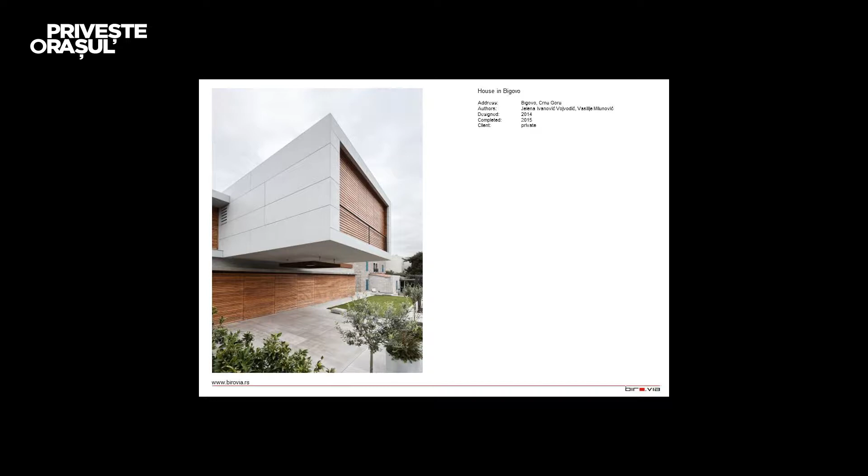So let me start with my lecture. It's going to be presenting some of the projects done in our office. Birovia means Vojvodic Architects, and I'm going to remove - I'm not so in love with myself. It's starting from the previous lecture I've done, and I'm going to start with the first project, actually, which is not my design, but I'd like to share with you.

My lovely wife, she's present here. She's looking at me with so much love. She's the one who is responsible for this wonderful house. And I should say wonderful really because it really is. Sorry, pardon my English. I suppose you will understand me quite well. And because someone says pictures tell a story more than 1,000 words, I'll start with reading some of the words and showing you pictures.

First project is in Bigovo. This is a small village in Montenegro. In front of us is a single family summer house. Thank you, in Montenegro. This is a result of previous cooperation with the investors for whom the authors had already renovated an old fisherman's house nearby. I'm going to show you this.

Bigovo is a seaside fishing village located in one of the most beautiful natural bays on the Montenegrin coast. The investor bought an adjacent plot and the existing 3-story building, and he demolished this building just to have a completely free plot to build what you're going to see. The new building is a product of an extension of the investor's needs.

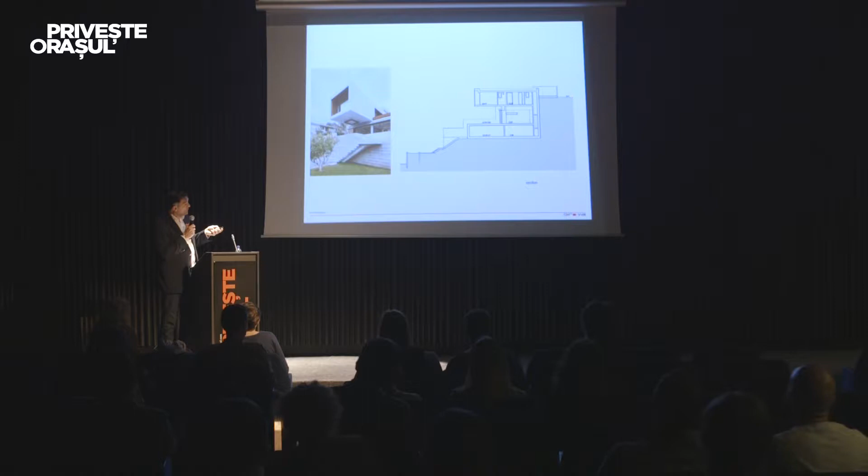The design of access to the building and its internal organization is a result of terrain configuration, which is actually like this. You can see there is a difference between the approach road and the sea level of more than 20 meters. The landscape design and organizational schema of the house itself is based on the principle of surfaces in the continuous flow of interconnected stairways. It's like this, and on the following pictures it will be more clear to you.

Paths and retaining walls - you see there is almost a 3-floor high wall. We used natural materials from the actual site surroundings, as well as large fiber cement boards. Using these boards, and this is actually over there, we have emphasized the cubical form of the upper floors. My opinion is that this building, the way it was designed - its form, internal organization, and relationship to the immediate environment - is an immediate response to the eternal challenge of looking for, architects will know this, genius loci.

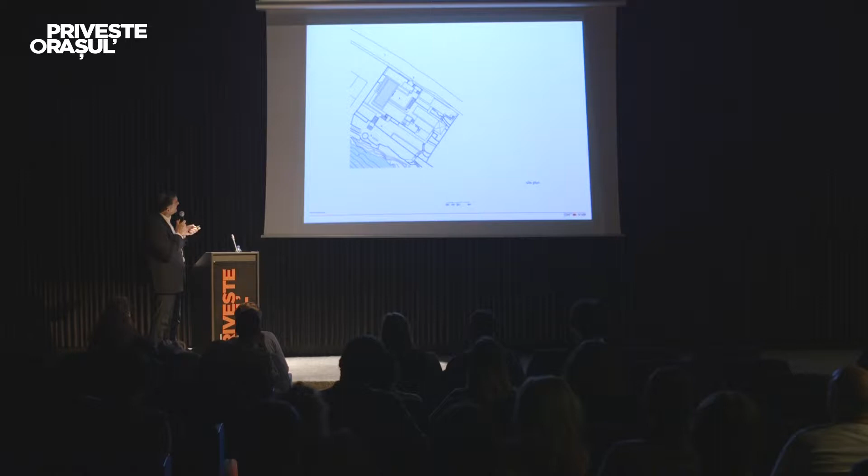So it goes like this. This is the site, this is the approach road, this is the car, this is the existing building, this is the car parking place, and you enter to the plot and to the different levels of the house from this side, along the staircases.

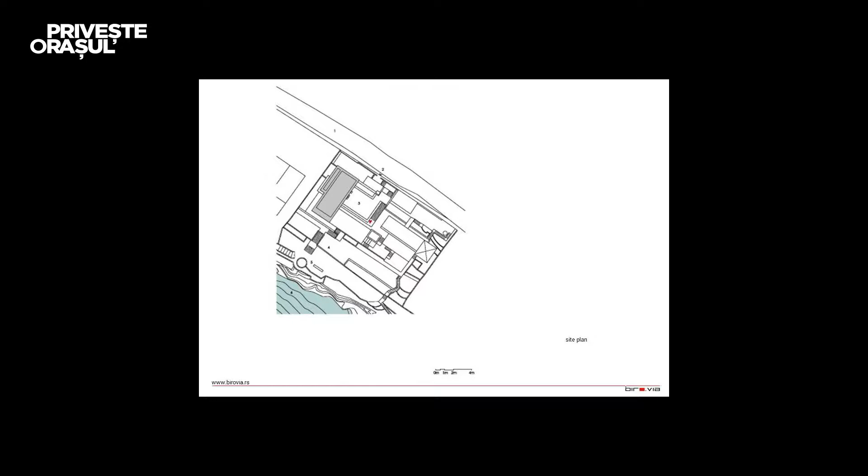Okay, it's a joke with these things, but hopefully I'm gonna win this game. Nevertheless, this is a basement, so-called basement, and you can see that the organization is pretty clear.

This is the service area with the Turkish bathroom. This is the kitchenette or kitchen with an extremely big eating table. This is the sitting zone, and below the upper floor it's a zone to sit protected by the sun. Over there is an organized service area and also something like a grill, because the owner is a great fisherman.

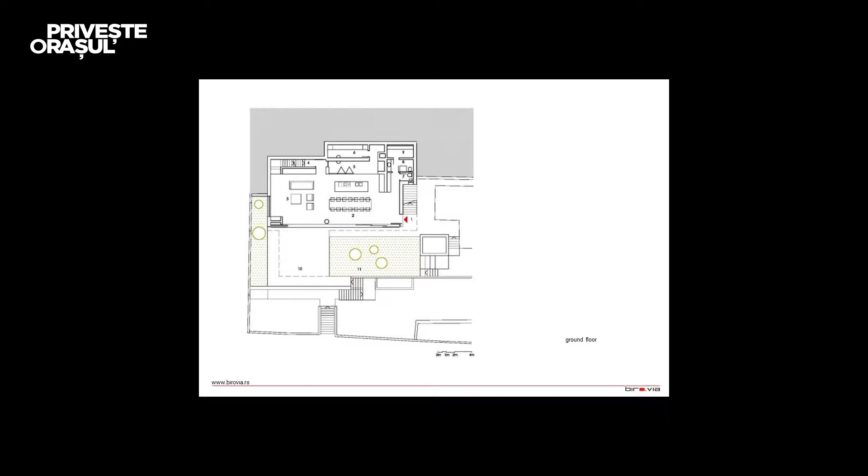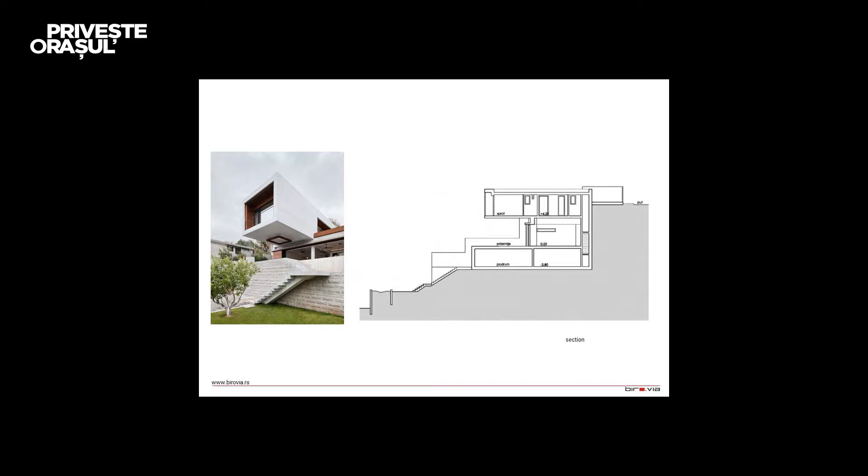This way you can realize what's going on and how the building is positioned. There are 2 cubical forms. One is horizontal, and the upper one is turned 90 degrees, and it turns to the seaside.

You see these supporting walls, which are covered with natural stone. This is one of the paths which leads to the other houses.

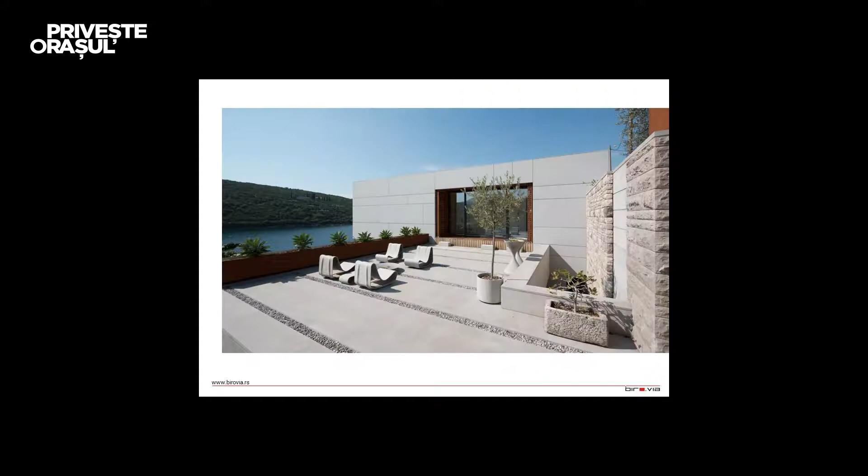This chimney is from the grill, which is one level under. This is the terrace, the approaching terrace. You can see the seaside, and the sea level is not so far away.

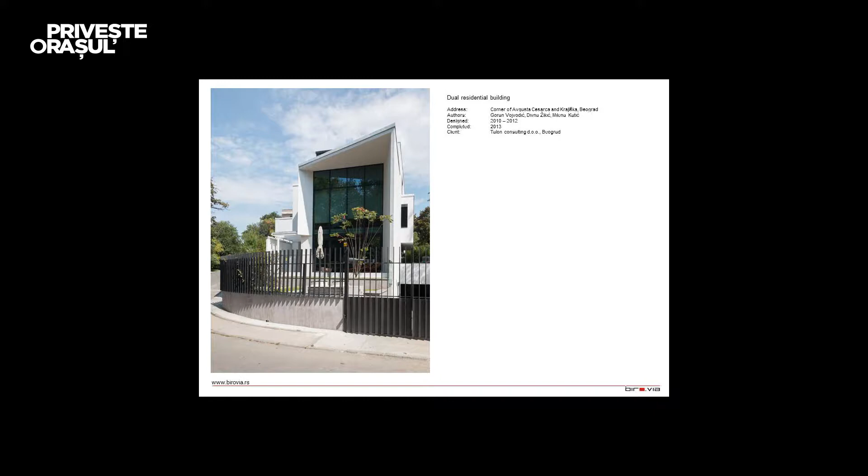Thank you. The next one is actually an object which is not finished yet. It's going to be done in a few weeks, I think. And this is the dual housing in Belgrade.

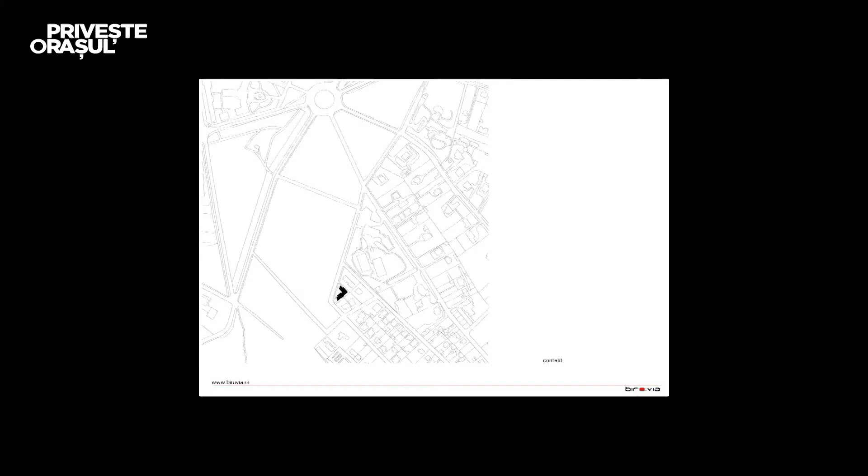What is interesting is, I'll show you, we were dealing with a very small plot. The investor decided to have two separate residential buildings where there was place for just one, with common vehicular access and a garage level.

The houses, apartments, are organized on three above-ground levels. I'm gonna show you. And one underground level with service rooms and facilities.

Underground doesn't mean just a garage, and you can approach from that side. Every house has its own underground level with facilities like saunas, Turkish baths, gyms, etc.

The premises are divided into day and night areas, floor by floor. The living room is on the ground floor—this is this one, and the other one is like this one.

It's oriented on two sides towards the courtyard, the quiet part of the plot, because this is the main road. It's similar with the other house.

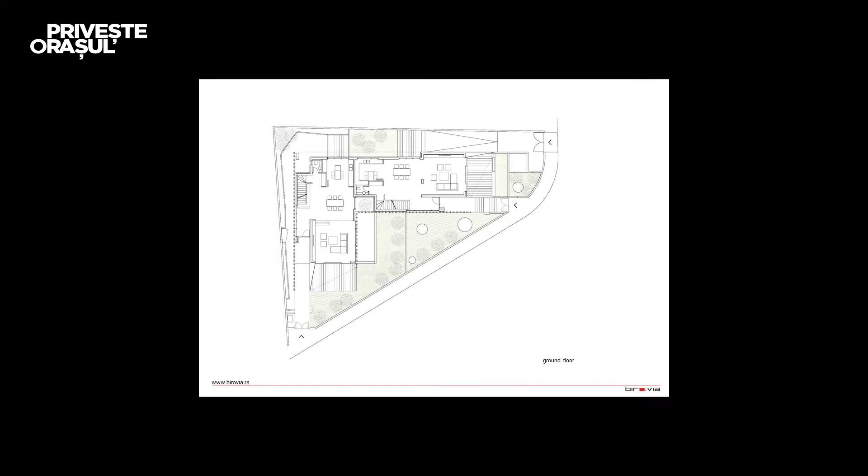The area for the children is the next one, and it's similar in both houses. Okay, it's this one, sorry, because actually the investor of one of these houses changed.

He switched the second and the third floor, but the organization is like this. You see there is a kids bedroom with one bathroom and a playing area. On the first floor of this apartment there is a void, a free space. There is a wardrobe and a big huge bathroom which belongs to the parents' area. On the top floor there is a parental suite with a terrace.

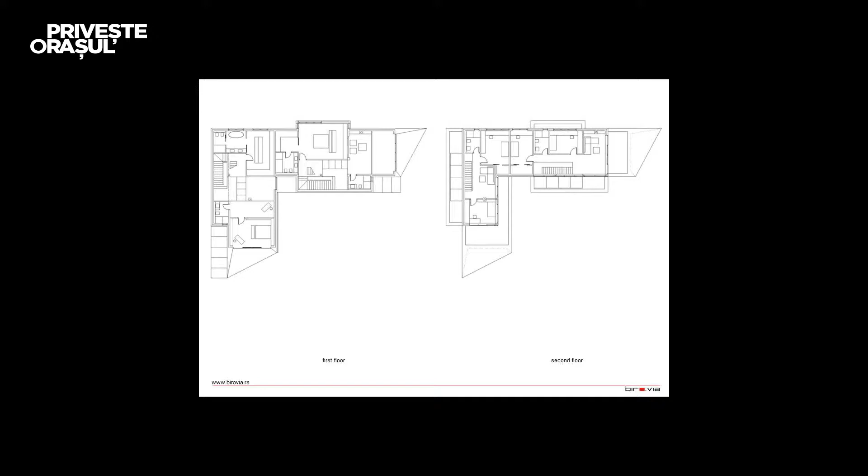This is the other one I showed you already. The form of the building is simple, reduced to a cubicle, and what was a huge task was to divide this plot and the buildings in a very similar way. That means we achieved this because both houses have exactly the same square meters. Differences between the courtyard areas are within 3 square meters, and they were very pleased with this.

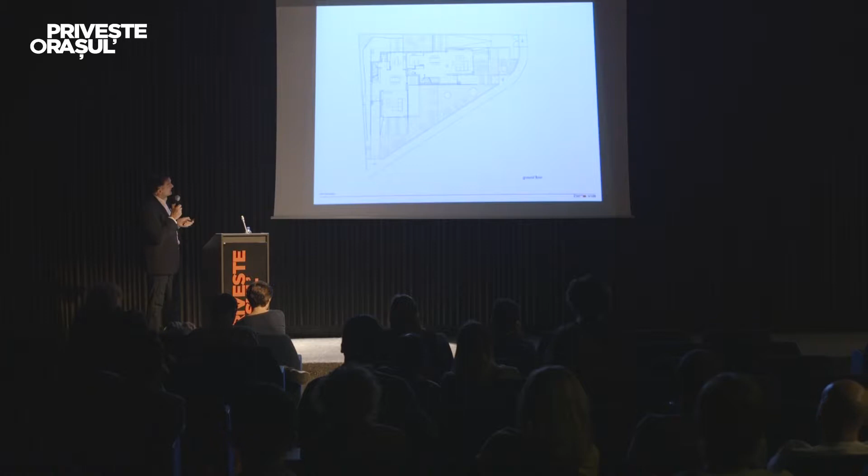That means this is one house with its courtyard, and this is the other house with its own courtyard, and this is the approach to the garage level.

I insist on designing this building to be cubicle, very clean, without many elements, and with so-called less openings, fewer windows as it can be. Someone might ask, what does that mean? How can you live in a shelter? What is it? But it's not like this, and you're going to see this when I show you some interior pictures.

For security reasons as well, part of the architecture are these vertical elements, a Hunter Douglas product, which are movable and can be closed totally. Then the area behind them is not visible, either from outside or inside.

From this image you can realize how small it actually is, because both apartments have no more than 240 square meters. Like I already said, this plot is quite enough for just one family house, but it's not like this.

This is the approach for the first apartment, and this is the approach to the second one. They have this portal absolutely the same, and rotated one to another, meaning they don't have direct visual contact.

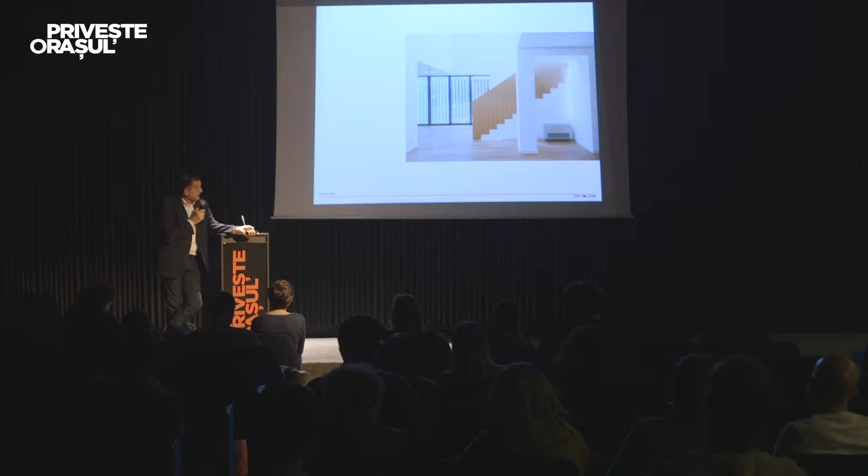There is one thing I would like to share with you. Somewhere I read some months ago that Sir Winston Churchill once said something about architecture, and I should say he is right: first we design buildings, shape them, and thereafter the building shapes us. This is something that really works in a very severe way.

These are the ambients from the house. This is the dining area, living space with the fireplace and the chimney, and this is the way to go upstairs.

In one part, both houses have a double height, so this provides a lot of sun and a lot of air, so to speak, and gives an impression that the space is much, much bigger than it really is.

These two images show us the way up, from the ground floor to the first floor, and then from the first floor to the floor where the kids are.

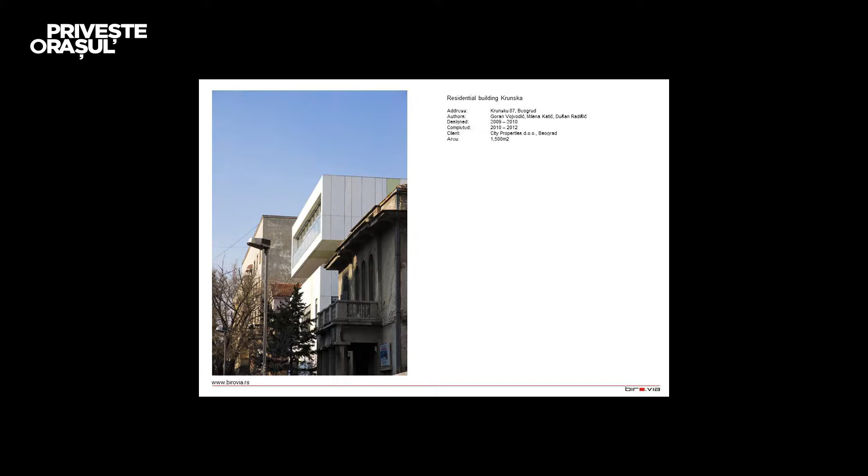This is the next building. It is in Belgrade, in the central part of the city. This is a mixed-use residential and commercial building.

It is located in the old town, in a street full of pre-war urban villas. The idea was to create a building on the corner. This is the eternal theme in the world of architecture, a never-ending story, which corresponds to the immediate surroundings but also imposes its presence.

This is the site, this is Krunska street, and these are the residential buildings. This is actually the plot and the position of the building.

The volume and construction... the ground floor has a commercial use, while on the upper levels there is one apartment per each floor.

The building is equipped to the highest technical and technological standards on the principles of the so-called smart house, because I think houses cannot be smart. Smart are the designers or the users.

The decision was made to keep the existing garden on the ground level. This is this part, a small part, as a part of the cultural, historical and urban heritage of this whole area.

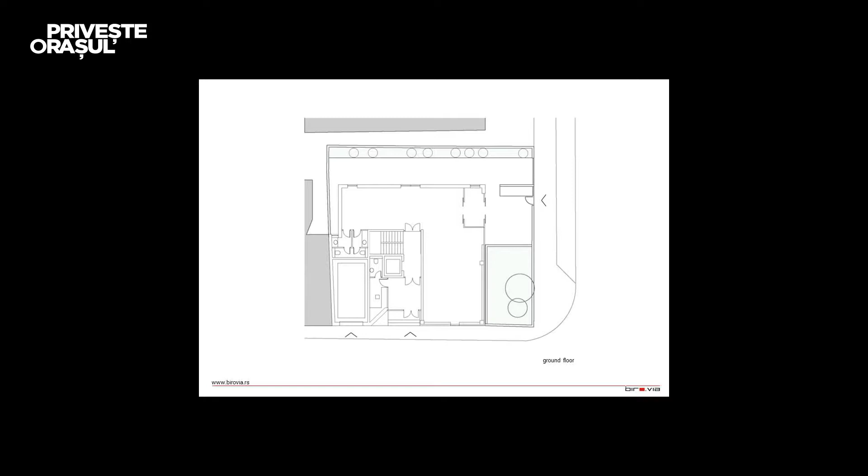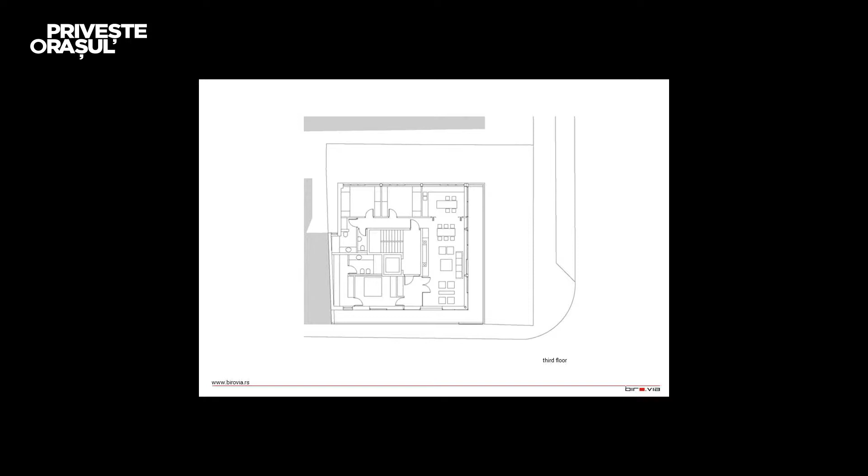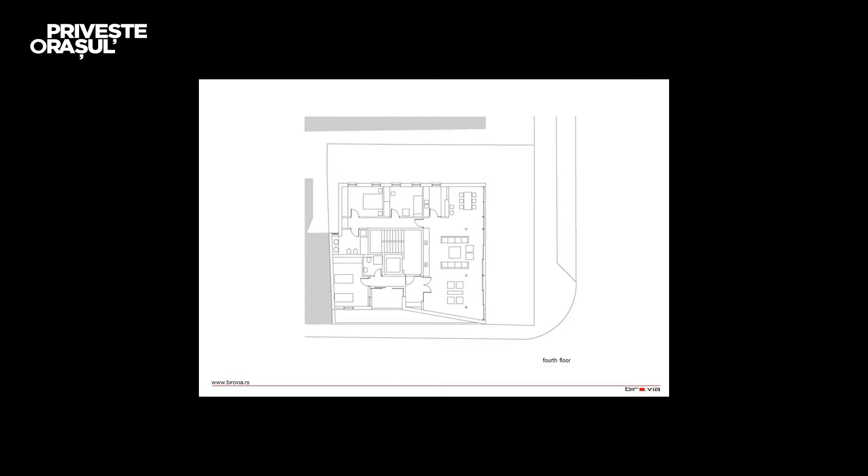This is the second, the third floor, sorry, which I made a little bit differently, because I'd like to emphasize, like I already said, the fourth floor, which is a little bit on the angle change. It's like this, but more or less the facilities and the organization are similar. This is how it looks like.

This is this angle point, a small garden in front, like all the other houses. Unluckily you can't see them because of these cars. And this is the small trick we made on the upper floor.

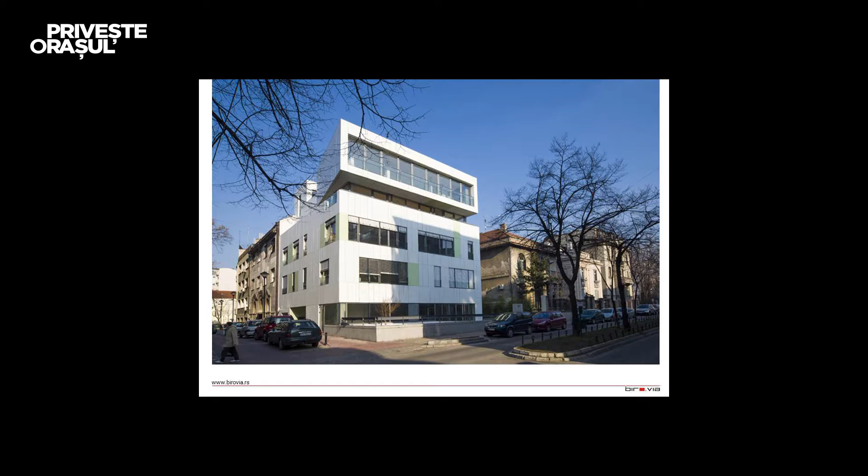This is the view from the narrow streets behind, and then exactly you can see what was my idea, to make a cubical form with a little rectangle, I mean changing the angle.

I tried to manage, and I think I've done it in a proper way, that this simple building with simple openings brings a new theme.

Yes, how does it look like? I'm very pleased with this project, but there is a very interesting situation, because half of the professionals, that means architects and the guys who are very close to our profession, and my friends, very close friends, were divided to half, 50 and 50%.

Some of them say, you must be crazy, what was wrong with you to build this kind of, like a refrigerator? And the other guy says, yes, this is the wonderful thing, something absolutely new, fresh. And what should I say?

We'll see what time will bring. Maybe the ones who were strongly against will change their opinion. Hopefully they are going to do this. If it's not like this, nevertheless, I'm pleased with what I've done, as well as my investors.

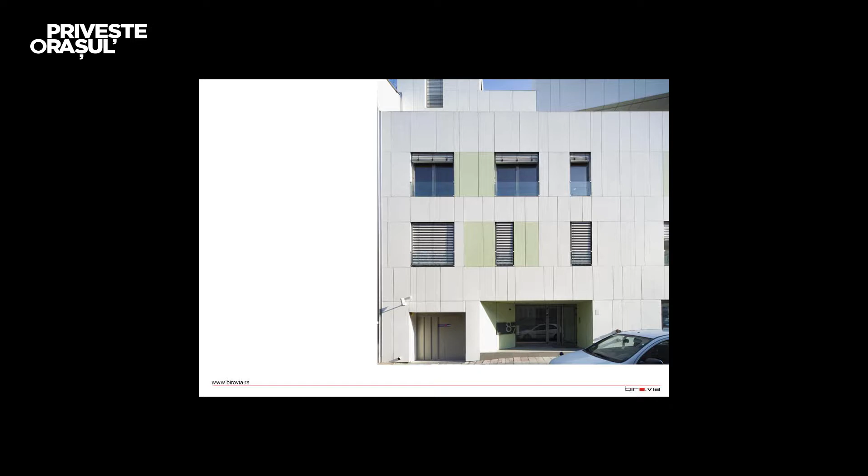I'm going to show you something. This is a residential building, but it's EXING, it's an investor, and this mixed-use residential and commercial building is a result of bidding activities. After winning the anonymous public architecture competition and preparing all necessary plans and documentation, the actual construction came into place. This certainly represents the epitome of the dreams come true for architects.

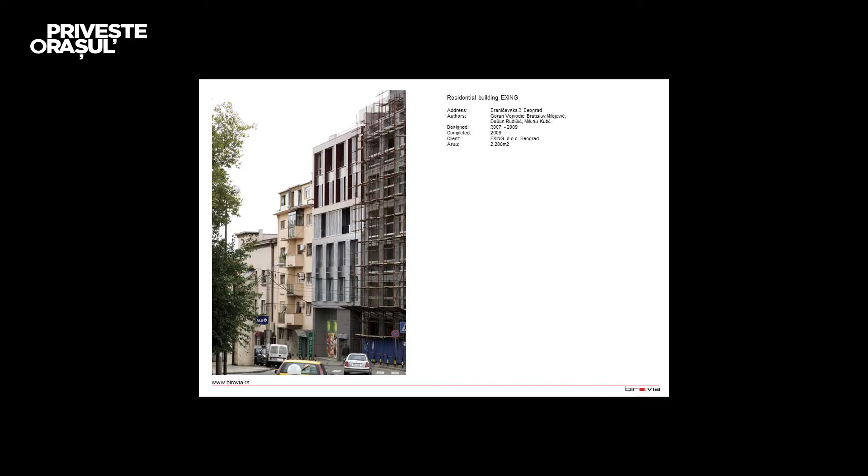The volume and construction possibilities were strictly defined, so the authors were left to test their skills and fit the required content. The ground floor and the first 2 floors are commercial use, shops and offices, while the next 3 levels are residential facilities.

I'm going to show this to you, if this gadget works. Yes, it's like this. And maybe the next one will be my study, yes. So this is on the street level, a small shop. These are 2 dentists and a psychiatric office. And these are living spaces, the next 3 floors.

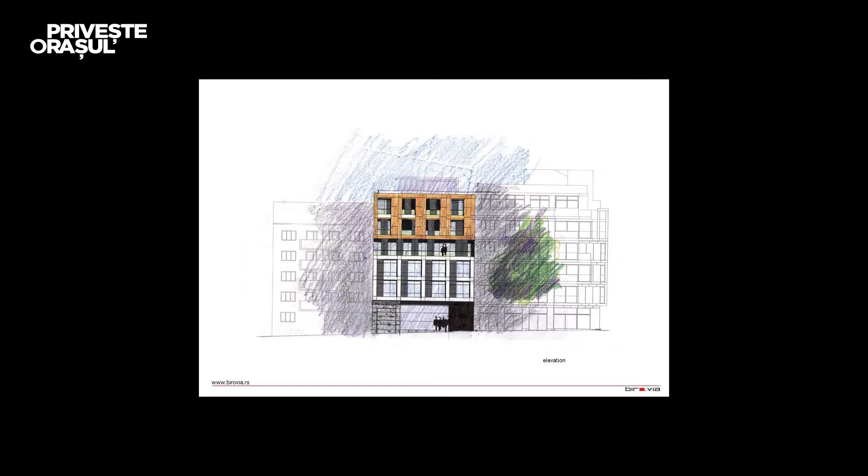An additional burden for the project was the small footprint of the building, especially the measure of the ground floor. And I'm going to show this to you.

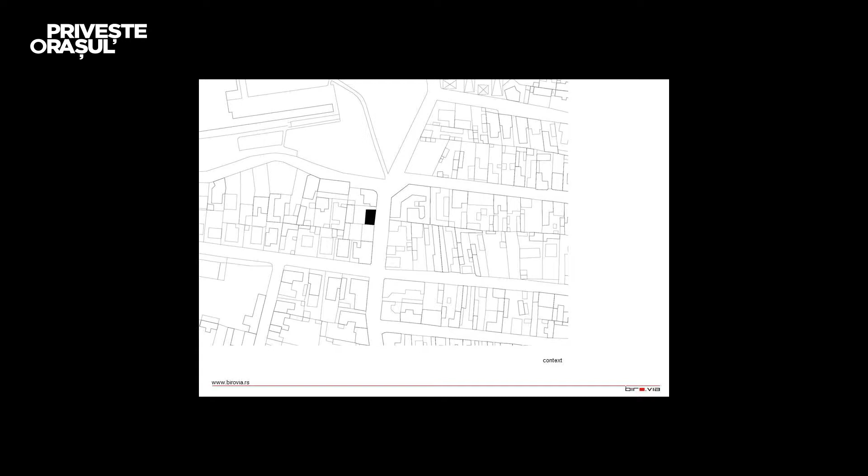Actually, I do not have a ground floor, but this is a typical living space. Why is this? Because at the ground floor it was furthermore reduced by the vehicle elevator and the double staircases. Why double? Because according to local regulations, we have to have separated, divided staircases for different uses - one for the apartments, another one for the offices.

The street facade is double ventilated and made of alucobond.

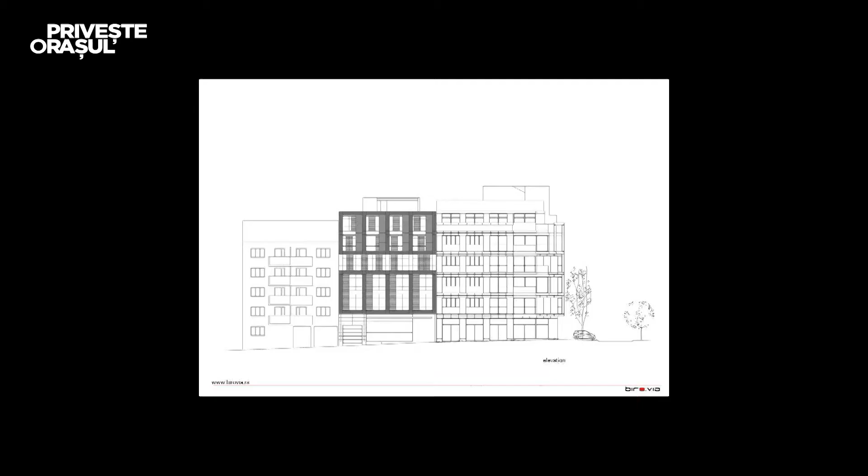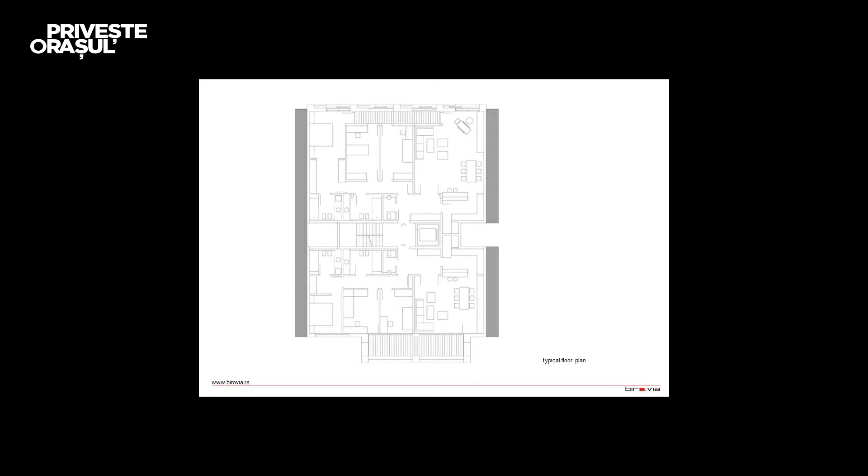Yes, like I already told you, we were using as a material alucobond in a different style, which also emphasized the use of the building. I mean, this is the office space area and this is the living area.

Actually, I wanted to have some materials close to a wooden outfit, but they did not agree with me, and then we used colored alucobond. This is a composed material, which I'm not so pleased with in this color, but this is life.

Okay, I think that will be all.

Next, I'm going to present you, and it's growing, as you can see, from one house, one family apartment, to the double house, then I have urban villas, and now I have a so-called hippodrome. It's a residential city block built in Kragujevac, a city not so far from Belgrade, it's, let's say, some 100 kilometers.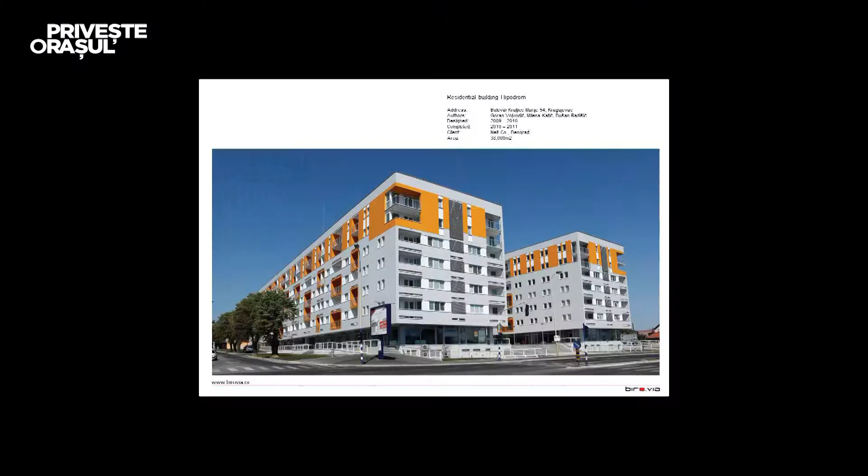Virtually the entire plot area is a parking space, formed by two parallel elongated cubes. The length of each of these cubes is 118 meters, and the width is about 19.5 meters.

This urban development is an open urban block representing the beginning of a new axis from Queen Mary Boulevard till the Hippodrome. Nowadays they started with the shopping mall, and now there are other buildings, except this one, where works are still in process.

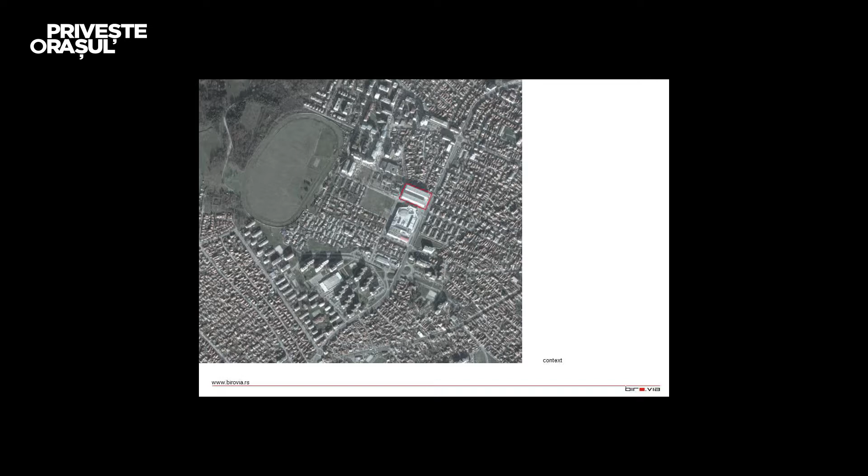The design furthermore emphasized this concept by creating a continuous whole of internal courtyards with green areas, pedestrian walks, and also children's playgrounds.

Now you can see over there these two parallel blocks of houses with access to the ground level where the parking lots are. These are the organizational units in the blocks. The main approach to the buildings is actually from this courtyard, because on the outside area are these shops.

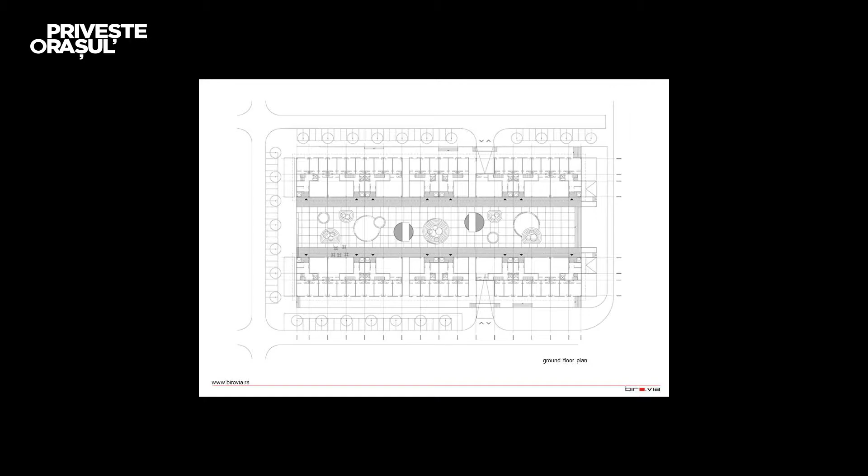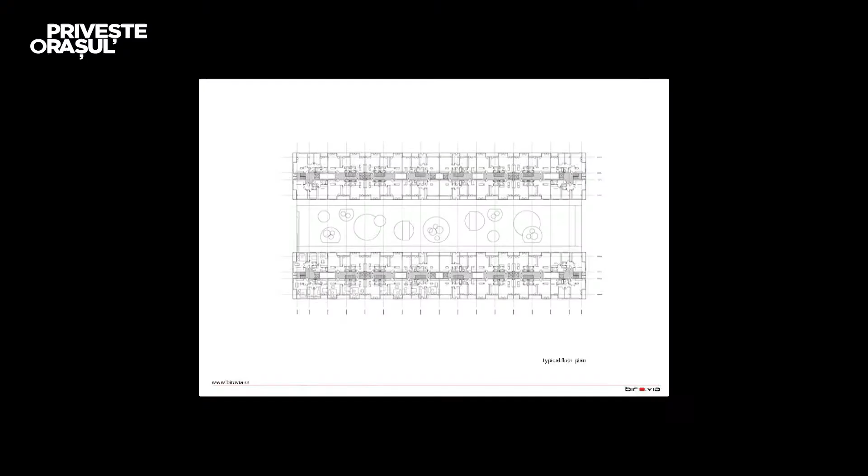The materialization is a result of a limited budget. The entire construction cost about 13 million, which, considering how big this is, is almost nothing. The only compromise made in the architect's favor was a limited use of ALU composite panels.

Something I didn't show you is the relationship between these two cubical forms—this courtyard enclosed by the buildings—and this is the approach to the garage level.

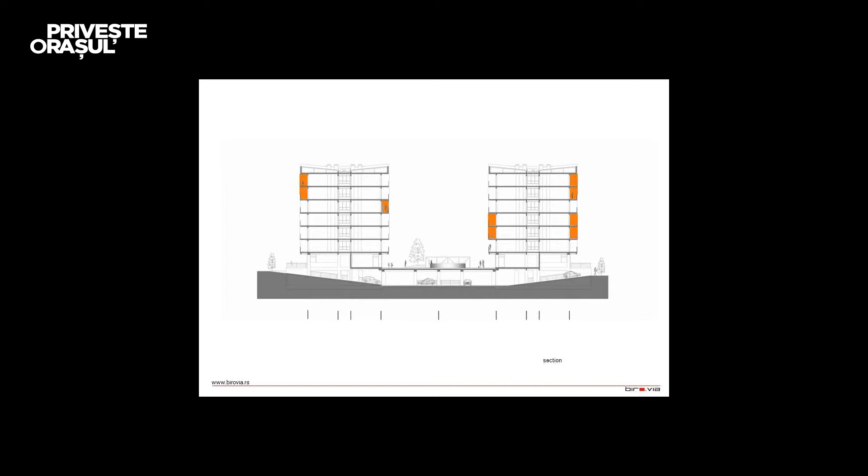By change of rhythm, I'm going to show you this: these are the elements of the facade, and the rhythm of playing shadows with these loggias and terraces across the entire surface of the building.

With changing the color, like I already said, we tried to manage and bring so-called power in a different rhythm to something which might otherwise be a very boring facade.

Some more images and details, and we are done with the apartment houses.

In front of us is the office building called Annex, named after the investor. This is a commercial building resulting from a very interesting conversion of a residential-use building into offices. I was very pleased with this—not just with what I've done, of course I'm pleased with my work, but I was very pleased when they changed their mind from apartment buildings to an office building.

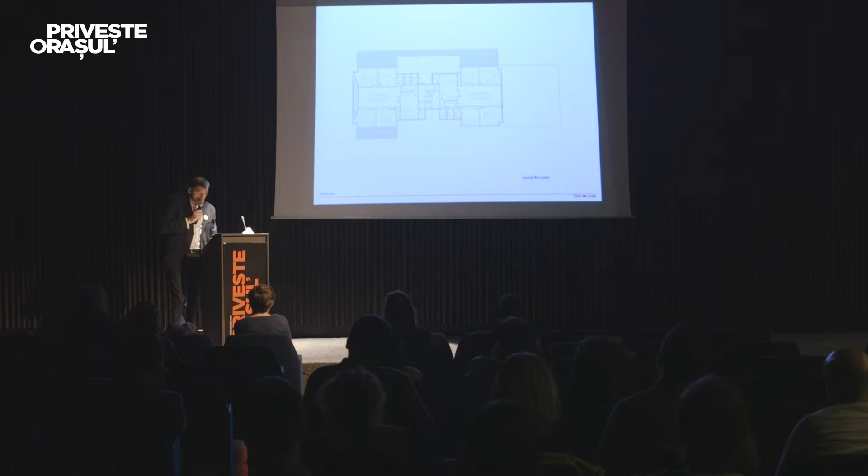Let me explain and continue. This is the approaching area, which you'll see later by the pictures. This is the hall, the lobby, info area, and then the area with the lifts.

Here you approach the lower level for the garages, of which there are four. In the backyard, we've drawn several offices, but actually there is a wonderful restaurant.

All the above-ground levels have the same functional organization, except of course the last two, which have been converted—unfortunately I don't have a picture of this—into a high-end exclusive penthouse for the investor's own purpose.

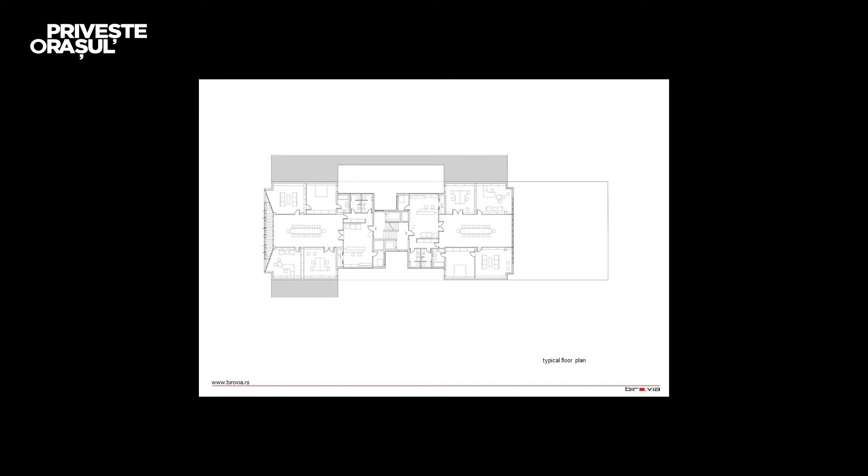Highest quality solutions—let me show you what I mean. This is the relationship with the street facades, and in the surrounding area, of course, it's internal.

What I wanted to say is these high-quality solutions were implemented in selecting construction materials. The facade is designed with the principle of a double skin—you can easily see that on the surface there is only glass, and then about 1.5 meters deeper is the real facade.

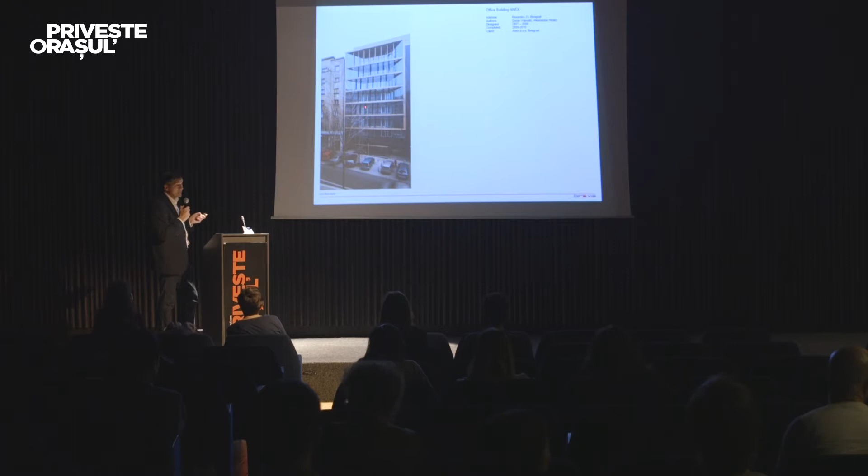In this way, contrast and dynamics of the facade have been achieved within an otherwise static street plane. All the buildings in the surroundings are, let's say, ordinary buildings, and the investor said, okay, let us make something new. So that were our...

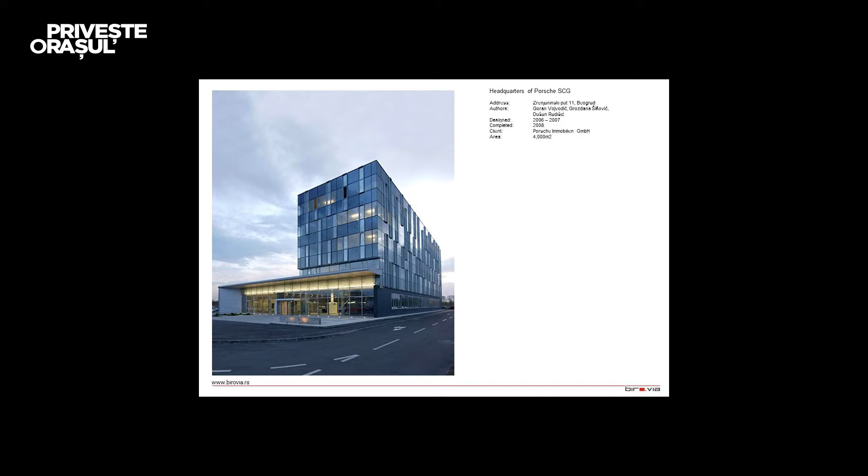Next one is an office building, headquarters of Porsche SCG in Serbia, Crna Gora, when we were a unique country - nowadays we are just Serbia. This project of an administrative building of Porsche's business system in Serbia, built in Belgrade, is the product of a long-standing business relationship, because before this building I've done for the same investor, Porsche GmbH, several buildings in Belgrade and Montenegro, which were actually so-called corporate identity buildings, showrooms for Audi, Porsche, and other brands from their system.

And I'm particularly proud of this commitment, given that the investor with headquarters in Salzburg, Austria, has entire teams of engineers and architects as well. And then Mr. Porsche, I suppose he was very pleased with our professional relationship, asked me if I would like to make a design for their office building. I said yes, why not. And that was something, you know, with someone with so much experience, spread all over the world, and they have their own architects, then asked me, could you please do this for me?

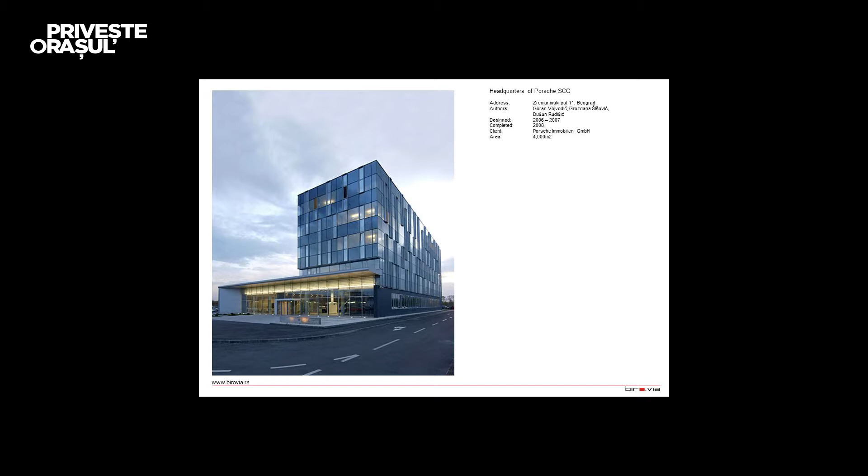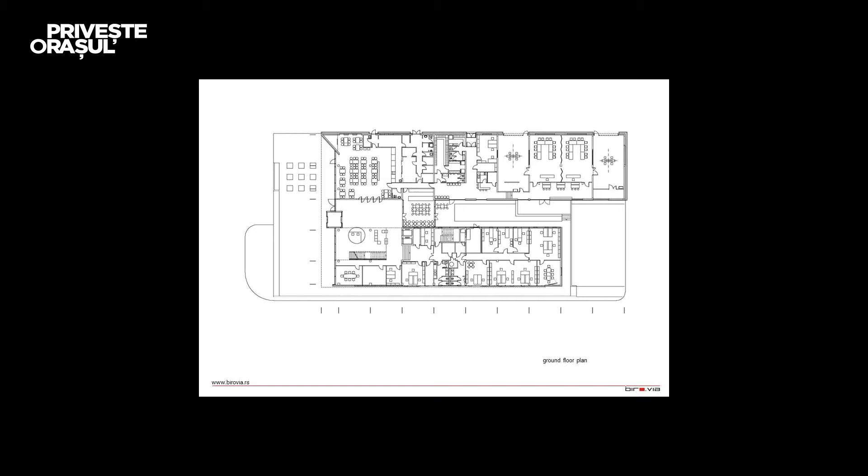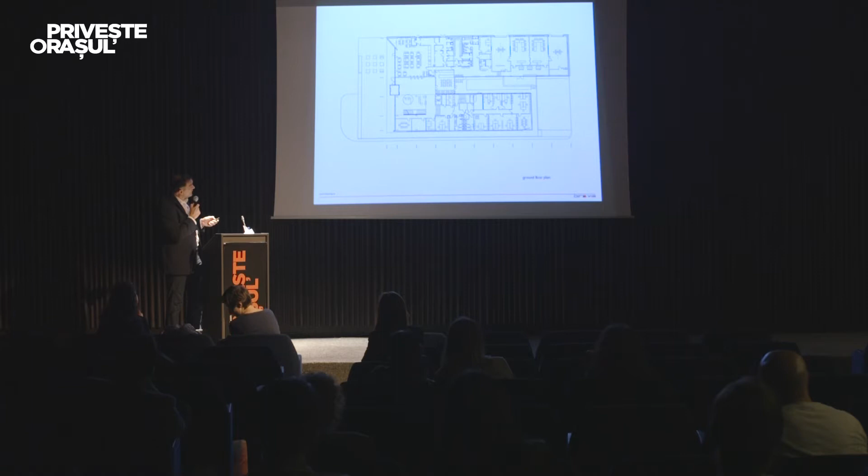This is the position of the building on the absolutely free plot, and this is the organization of the building. So here you can see there are 2 volumes, this one and that one. This is the tall administrative building, and the lower one has the space for training and working areas, and also restaurants with the kitchen. This is the entrance area with double height. And this outside is a cafe - you can go outside, you can enter outside, due to the smoking reason.

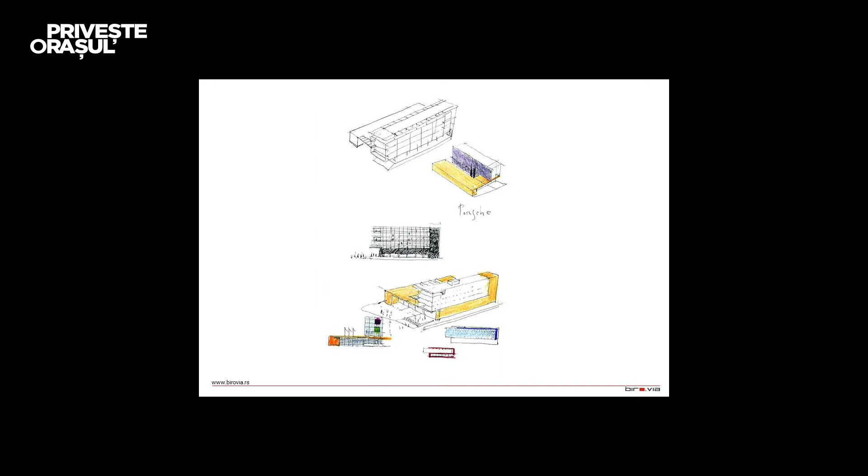These are my sketches, made while I was trying to find the right designing way to bring out everything formed in the so-called project task, given by the investors. And this is the result: a big volume, a very simple one, based on this horizontal part of the building.

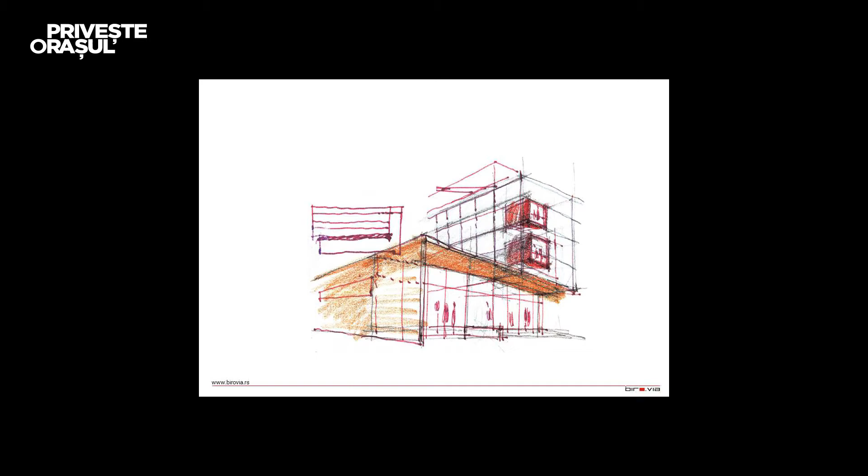Please, yes, some more of my sketches. This is interesting because this sketch I made at the very early beginning of the designing process of this building, and then some period after, the same angle with the existing building. It's pretty close. These are parts of the facade.

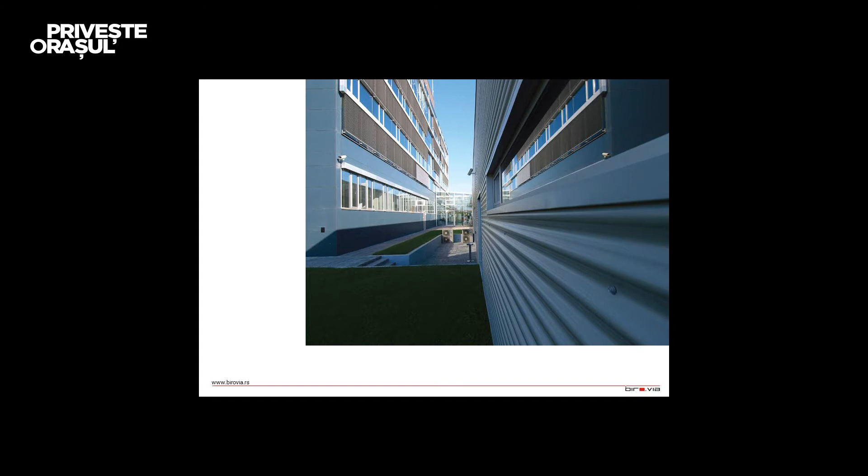And this is something I'm going to show, a little bit more of the details of the architecture. These are parts of the facade. These are the staircases which lead directly from the main lobby to the conference hall, made with dark triple glass in black color. This is the approach area, the main lobby, with the sunroof on top, with a lot of light.

And this is an info pult. We designed this pult with a little touch of the automotive industry. These are some sitting areas for the guests, and a night image of the same area.

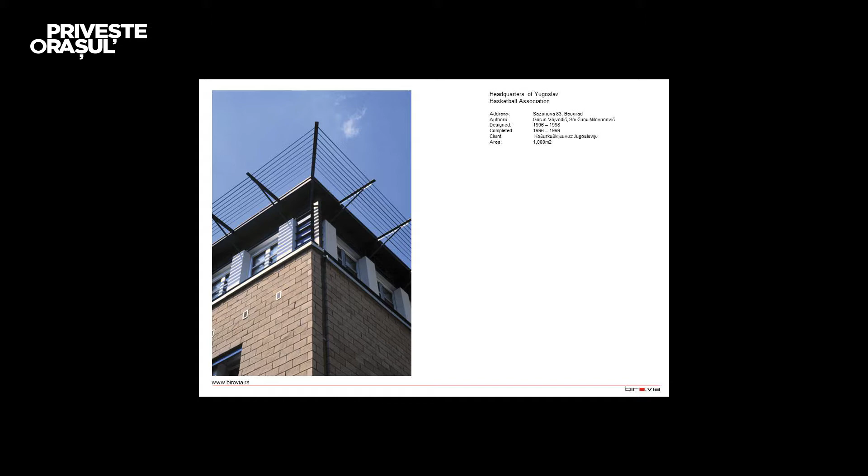And this is the image of the entire entering space with the double volume during the night. I'm done with this building - this is the game we made with the structure of the facade. The building in front of us is another category.

This is the reconstruction of the object. The building represents a reconstruction of a classical freestanding two-story family house with a loft that could not be used. Converting it from its original use with a classical structural system to a completely different purpose carries great problems and unknowns. This is the position of the building, and this is how it looked before I came in, and this is the real result.

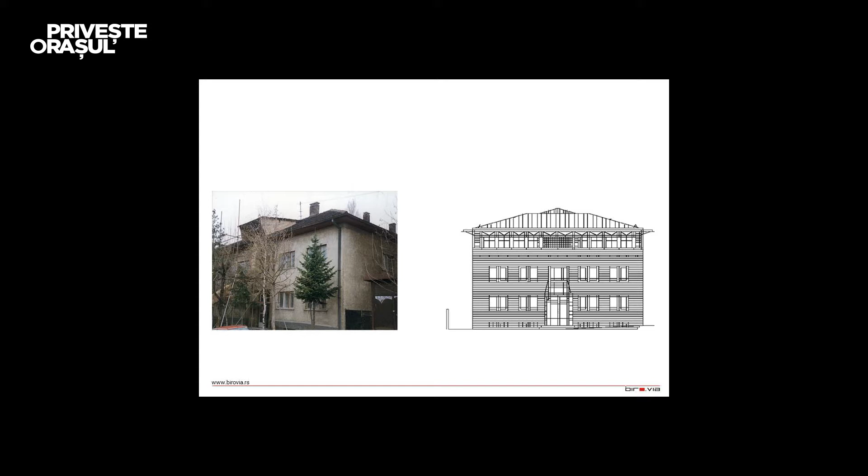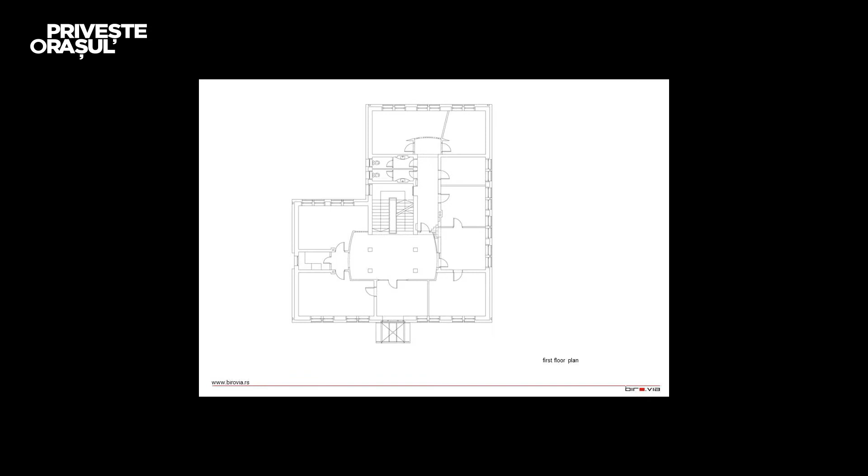This is, of course, drawings of the facade, the very same facade after the intervention. With the new structure, especially in the final floor, and with the introduction of the new facade layer - a crushed silicate block - the building got a brand new purpose as well as appearance, so one cannot recognize what was before and what is after our designing process. This is actually a building of the so-called Yugoslav Basketball Association.

This is the most medals won association in Serbia. When they finished it, they called it the home of basketball. This is the first time they have their own sitting place.

Special attention was paid to a glazed lantern within the roof structure, with which the central staircases and adjacent corridors were fully lighted. In the interior, the focus was on simple materialization and shapes with a very intense color spectrum.

I'm going to show you what's happening here. This was a typical floor and it was an apartment building, so we had to ruin everything. And then it's again a typical floor, but now for office use.

What they wanted from me is that they would like to have something like a conference room, and something where they should teach the coaches, trainers, basketball players, etc. It was extremely hard.

I decided to make a so-called fake, and I changed the structure and the angles of the roof. This height is on the same level, but I changed the construction, so there is a height of 2.5 meters, and then on the end it's 3.5 meters in the entire space. This is the lantern with the light which comes all the way down to the staircases.

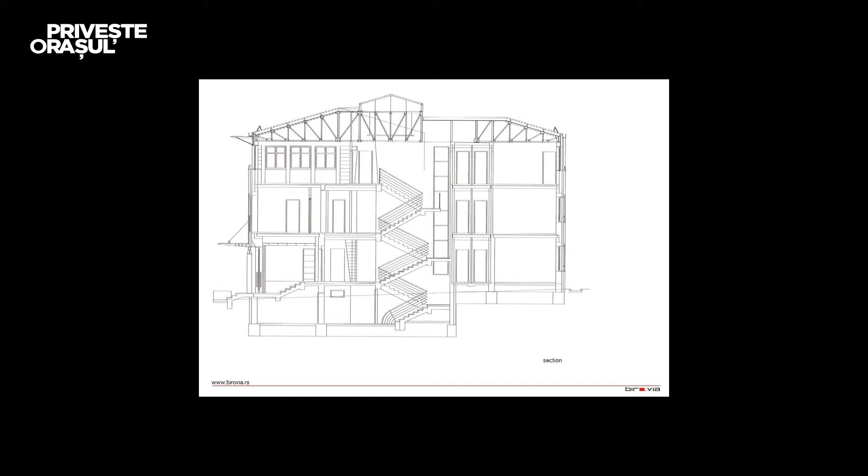I have these images, I'm going to show this to you. This is the entrance area and part of the staircases with very colorful images. This is a corridor - we used different glazed ceramic tiles. Some more of the corridors.

This is what I've done according to their wish, and it comes out as a very good conference hall. They didn't believe that it could be done and managed, but hopefully we did it. And there's another one, and there's a coffee area as well. I think I'm done with this.

Now there's some more of my images. I like to draw with free hands. I like to be a painter, but my late father, who was a military pilot, said please be an engineer and you can be a painter as much as you want. Nowadays I'm an engineer, but I'm not a painter.

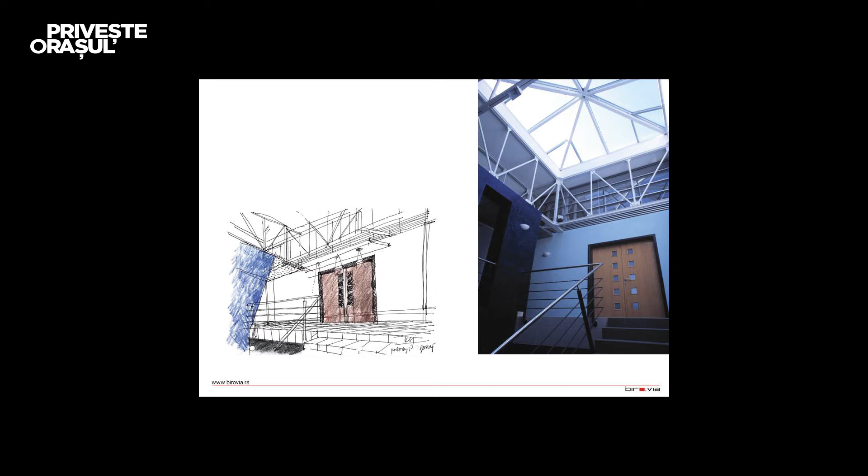This is what I like to do. Mostly I've done so many of these during the phase of researching the task, the project, the designing process, and this is the product of this. Pretty similar.

Some more images. Due to the basketball organization, I designed an entrance door. It's closed - maybe this image doesn't show it well, but this is actually the basketball and this is the basket.

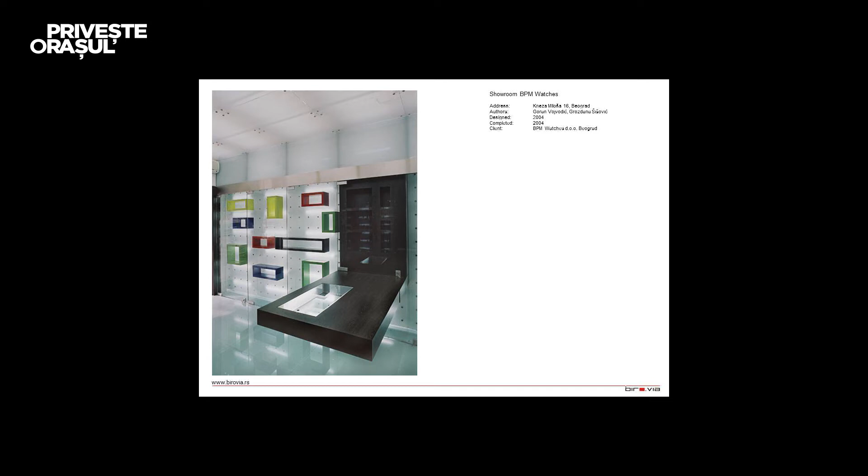Okay, we are just close to the end, hopefully. This is a showroom, and it goes with our... how do we call it? Ambient - yes, this is the ambient.

The engagement from this, what I've done, is a favor to my family friends who are dealers of various brands in the watches industry. It's in the middle of the city. It was a conversion of a law office into an exhibition showroom and a workshop for watches. And then it became a very big challenge for me.

With the help of the investor, which is very nice when you have this - mostly you don't, and you have to fight with them because they think they know much better than you what their needs are and how they should organize, what they want to have. So in the workshop of watches, with the help of the investors and their support to make a difference, I think the result was a satisfaction for all participants in this so-called game.

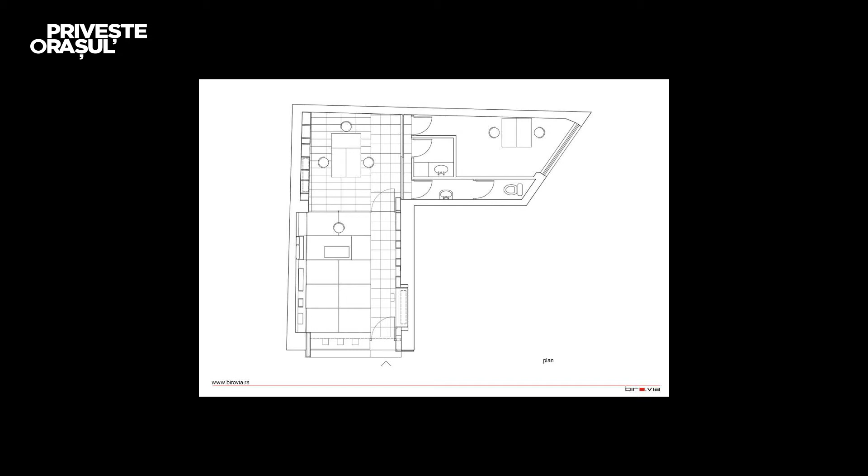Conceptually, the front part of the showroom, along with the window towards the pedestrian sidewalk, is public, and I'm going to show it - this is this area. And this is the area of services, with a small office along with the toilet, of course, and kitchenette. This is the entrance area.

These two parts are divided with a glass wall with an integrated Zifferblatt - this is the main thing for all the watches. This is the exhibit area for the watches. Let me know - this is the entrance.

The next is going to be something which I'm very proud of, and this is Belgrade Philharmonic Orchestra. The main characteristic of this building is that it has no facade, and it's a building for himself without a facade. How can it be? It's crazy, but it's true.

The Philharmonic - only a small part of this is the building, and this is the other building surrounding it. This is a small part which you can approach, and only above this part is a part of facade. Let me explain what we have done over there.

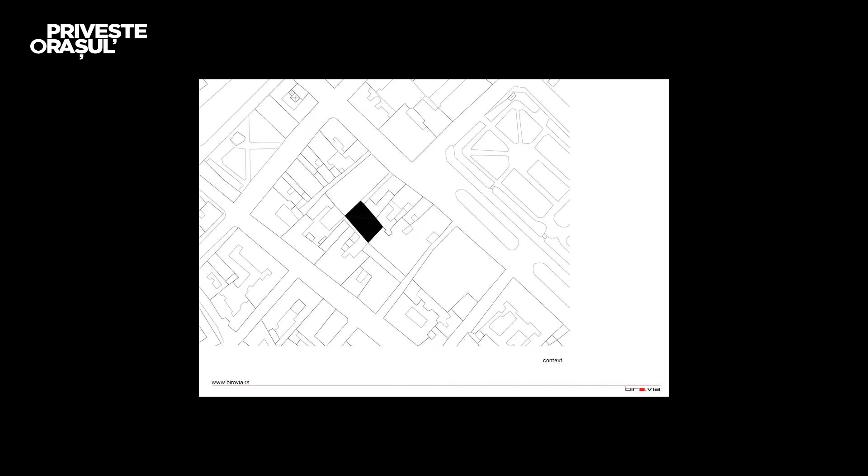The Philharmonic Hall is well known throughout Europe for its exceptional sound quality, and the greatest challenge was to renovate this space without disrupting the existing quality, since the building had almost no standard facilities, almost nothing, just this playing hall.

We had to organize an entrance hall, reception desk, cloakroom, etc. And I made a small trick, which actually cannot be seen over there, but it's somewhere here.

This is actually the object of the Philharmonic Orchestra, and this was a corridor, a house door, which actually no one used. I made the decision - I was so-called backed by the manager of these facilities - and we took this, which no one used, and organized it as an entering area, an entering hall with the desk, with the cafe, and this is the approaching way to the main entrance for the spectators.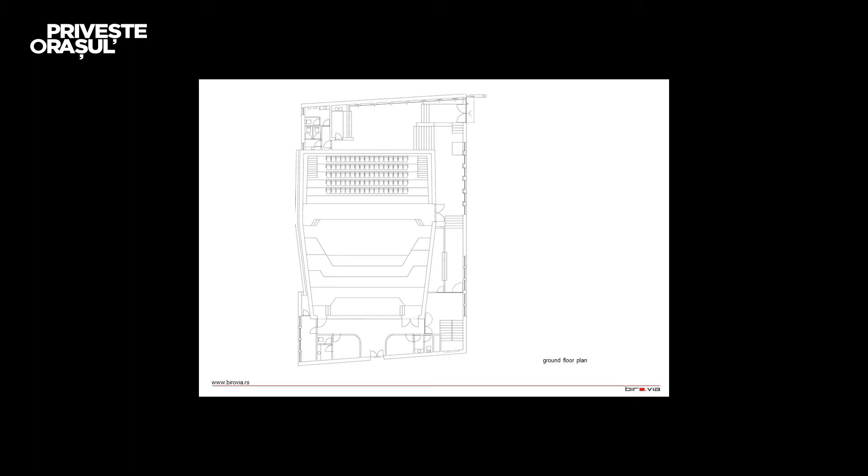In the interior design, natural Carrara marble is used, you're going to see this, Alcantara leather is used as well for finishes, and veneered with lacquered surfaces like Steinway claviers, made from dark walnut wood from Steinway pianos.

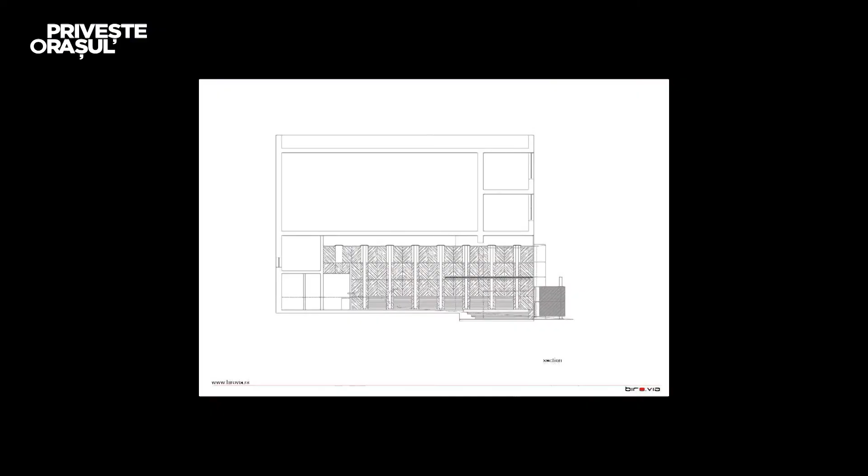And I'm going to show you this - it's like this, it's over there. So you see, this is the Carrara marble and granite tiles, the white one. And then this is Alcantara, which covers actually the whole volume of the orchestra building part.

Lighting is by Targetti, a very well-known producer of light, and was designed in accordance with the separate environments within the house. Acoustic finishes are Hunter Douglas panels, which are combined with extruded cube-like volumes, as you will see. Why is it necessary? Because of the quality of the sound.

This is actually the approach way. You can go with the staircase, and this is the main entrance. There is a glass gallery where some of the instruments are exposed to be seen, like a Stradivarius violin, which is more than 250 years old. So these are some images.

This is something we made as a frame, and here is a 30 centimeter deep slab of marble granite. So the champagne glasses should be placed over there during the pause.

This is the main entrance with the cubic info pult, and this is where you can buy a ticket for entrance to the hall.

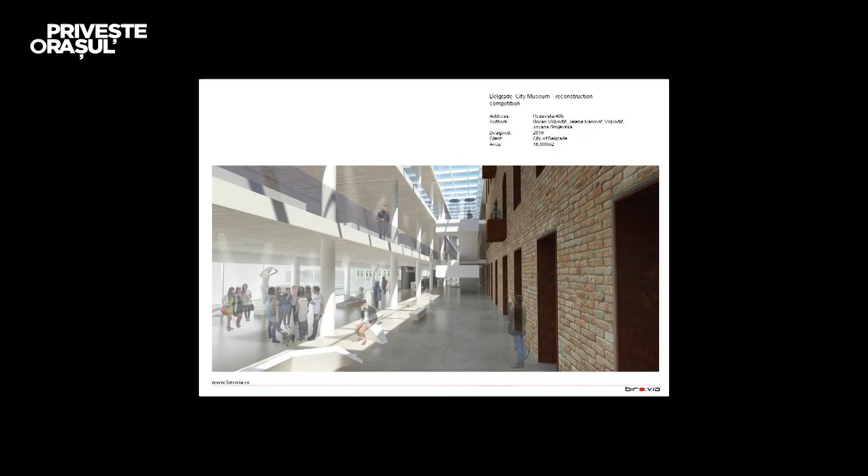Which was partly destroyed in the well-known bombing back in 1999. I wouldn't like to talk about this anymore. It forms a single urban city block altogether. I'm going to show you. This is where the Belgrade City Museum will be organized, and this is the whole block. It's a huge building, more than 13,000 square meters.

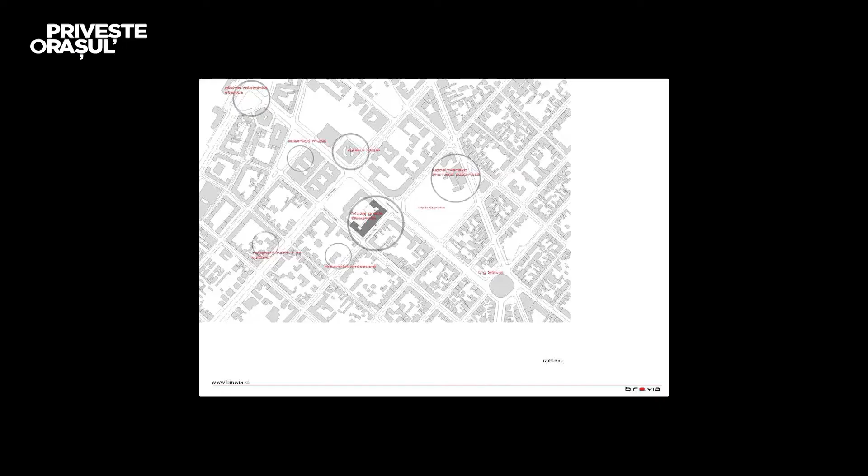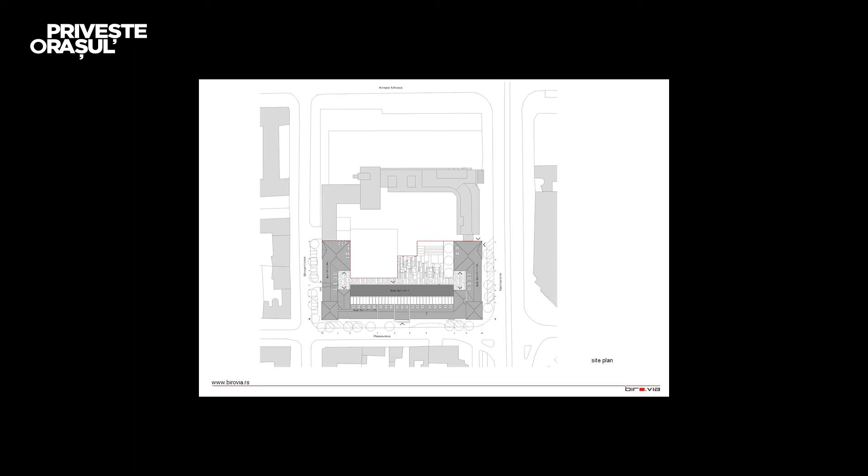The idea of the author was to maintain the existing building, and this is it, but I'm going to show you what we've done. This is the existing building, and this is the new part we bring to work together with the old facility spaces which already exist. For this purpose, a new 3-story building has been designed, which makes an infilled hall with the existing building, separated only by the glazed hallway.

The inner courtyard has been devoted to service roads. This is the inner court, and it's a strange shape, but it's really like this. You can enter from that point, and this is actually the service access, so you can approach the service lifts with the equipment and other things.

There is also outdoor exhibitions, lapidary, and a small amphitheater for various presentations and events. Museum storages, screenings, workshops, and service spaces are organized as separate entries. I'm going to show this to you.

Okay, this is the basement, but this is something interesting. Actually this is the shape of the building, previously, I mean it's still existing. There's a main stairway which is actually very problematic, and you cannot use it for the whole four floors. So we decided to demolish this part and bring a new one, as well as a panorama lift.

This is the new part of the building, but they are connected with everything that already existed. The old part retains the existing materialization, especially on the outside, but inside you're going to see what was planned in the images that follow. The new building is materialized with concrete and cast floors. The existing lantern between the two ships—this is the existing ship, the new one, and this is the lantern—enables diffuse light and makes a very nice ambience in the interior.

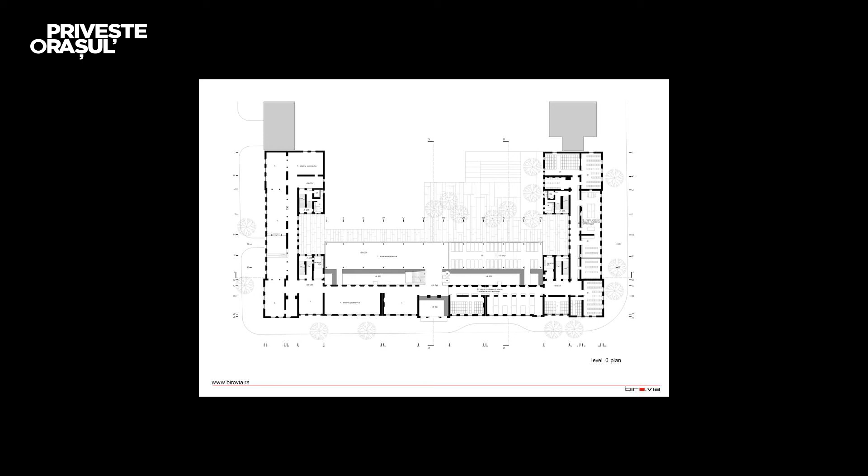The existing entrance was something like this, and then we decided to demolish these two floors to, firstly, give a sign of the building, and secondly, to have a nice entrance part. It's over there, and I think some of the images will come.

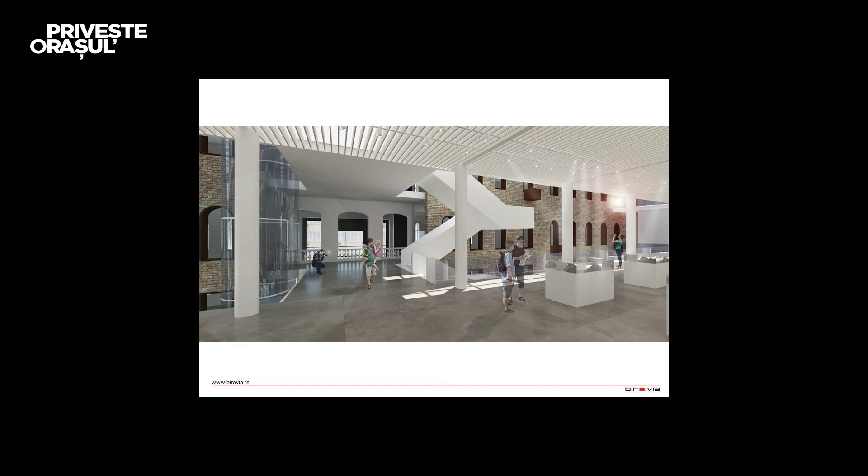This is the new building, and this is the old one with the openings coated in corten materials. This is the info desk, and the gap between the old and the new, as well as the lights from above.

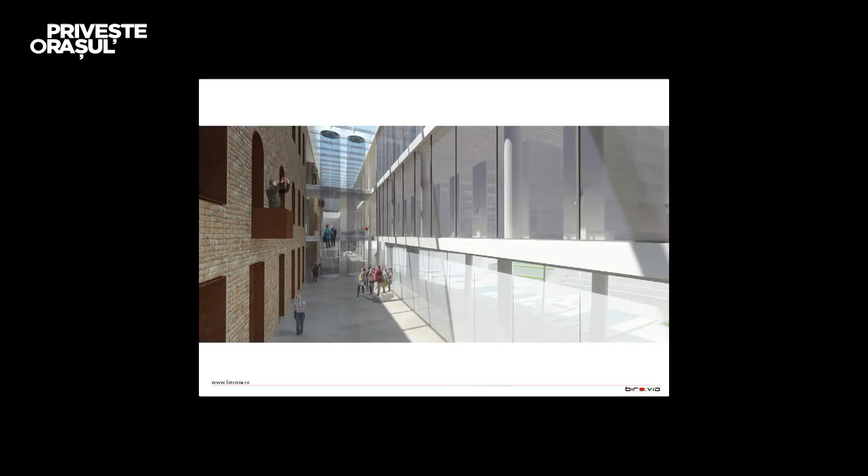The very interesting thing, and they told us this was one of the moments that improved our winning position, is that some of the depots are organized so they can be seen by the visitors, which is an absolutely new way of thinking about museology and how it works.

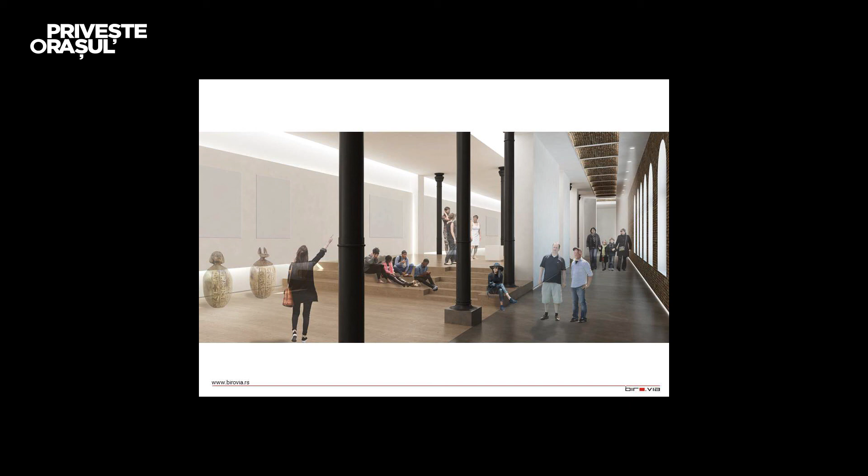These columns are steel, and they are from the original buildings. We tried to keep them in this very same place and give them a specific position.

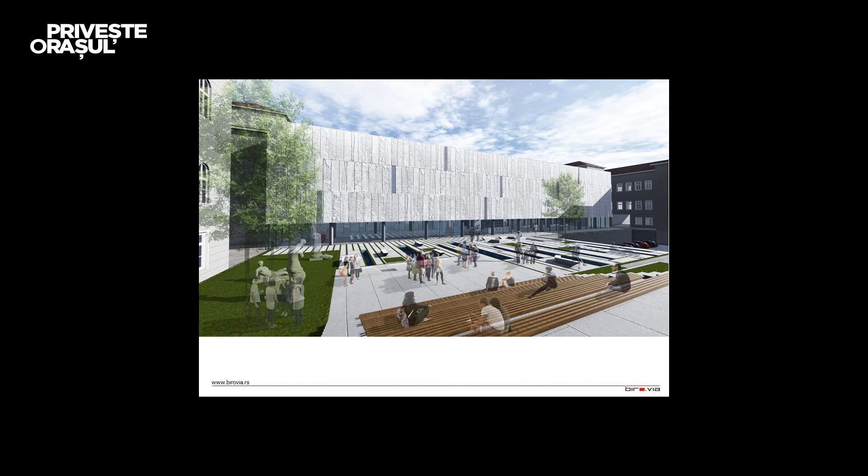This is the so-called new block. Our proposal is for it to be made from natural stone, with slabs of stone, naturally crushed, in very, very big dimensions.

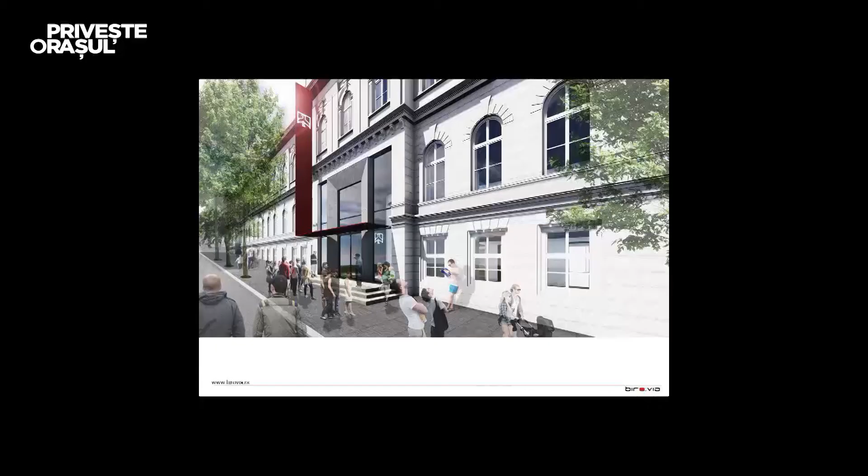This is the new entrance part. Some more images of the space we would like to create. These are the depots, main entrance.

And at the very end, since this building is huge but on the angle, at the crossing of two very busy streets, we decided that we should bring some kind of—not a statement, but something to inform the passers-by and tourists that something is going on—and this is maybe a facade. So that will be all, I promise. Thank you.